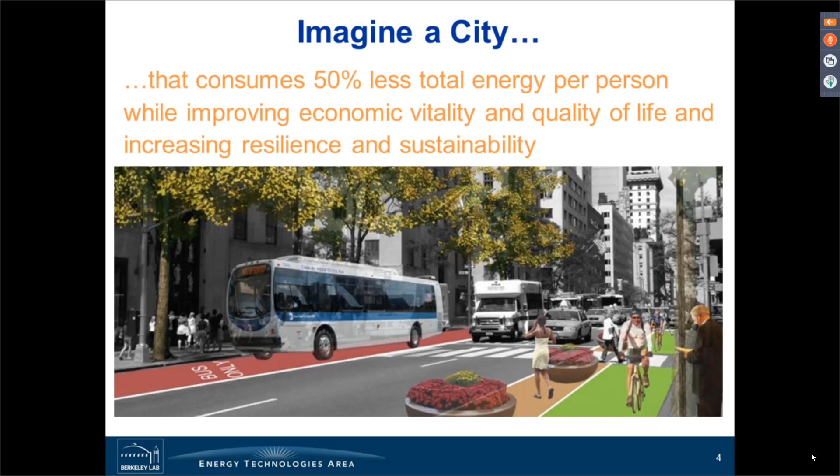If we look at urban research, we are basically talking about very broadly different sectors or areas - buildings is one of those, transportation, land use, air quality, water issues, public health, and electricity grid. All these are connected in one way or the other. So cities are a complex system of systems, research, if you will.

Particularly if we look at buildings, in the U.S. the building sector in cities consumes between 30 to 70% of the primary energy. There are city profiles by this City Energy Project, and if you look at, for example, a city like San Francisco, all the buildings consume about 52% of the energy. In New York City, you would imagine the ratio will be higher, it's up to 70%.

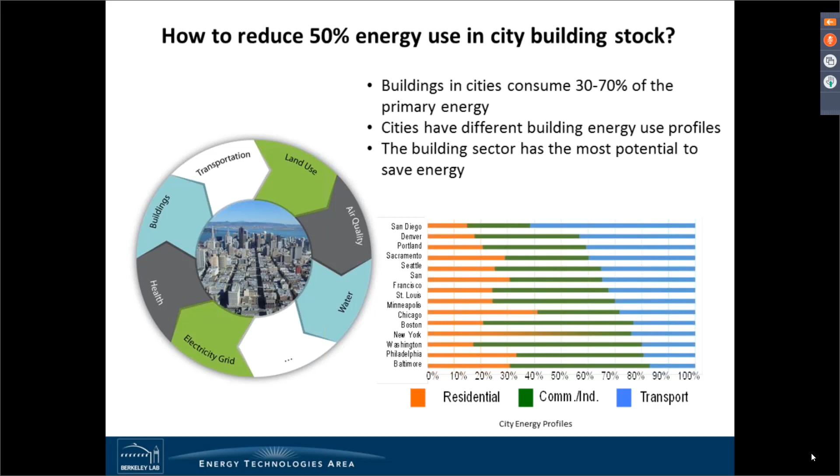So I think one of our research focuses is looking at the building stock in cities and looking at ways to help support cities in how to cut their energy use by half in the building stock.

I mentioned earlier, cities have challenges with all energy and environmental goals. More and more large U.S. cities are aiming for what we call 80 by 50 goals - basically trying to reduce GHG emissions by 80% by 2050. So I think to achieve the goal, what they really need is a lot of transparency, open data, and tools to support their effort to track and measure their progress.

So we have been working in an area trying to provide data and tools, and be able to collaborate with cities on how they or their consultants use the tools to support and prioritize, for example, retrofit investment, track their progress like energy consumption and emissions in the building sector, try to inform some of their policy making, for example incentive rebate design, and look at climate change impact.

And we've been working with a broad array of collaborators and partners - cities, urban developers, other DOE national labs. We also work with NIST on its Global City Teams Challenge, and some nonprofit organizations like C40, USDN, Smart Cities Council. There's also the International Energy Agency program in energy in buildings and communities. And of course universities are very active, so we also work with some universities and industry as well.

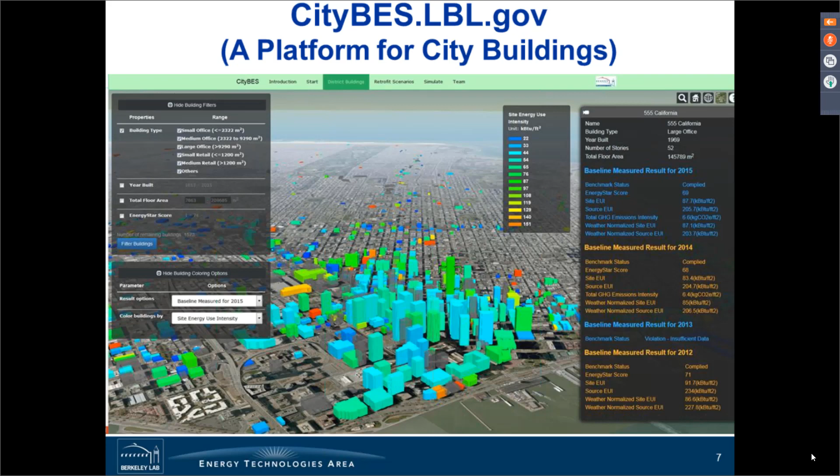So for the workflow, we have been designing the architecture of CityBES. There are, if you will, three layers. On the top, there's a data layer. Under the hood, we are using EnergyPlus and OpenStudio for the detailed energy modeling. So it's got weather data, and the building model uses a lot of geometry data. The building stock data also includes the building type, floor area, vintage, all that information.

And then use cases, just to illustrate some of the use cases our platform can do at the moment. We do portfolio-scale energy benchmarking. We're planning to do urban energy planning, and currently we have invested a lot of our time and effort in large-scale energy retrofit analysis, which we introduced as one of the case studies. And if we get access to large-scale smart meter data, we're also interested in looking at building operation at a large scale.

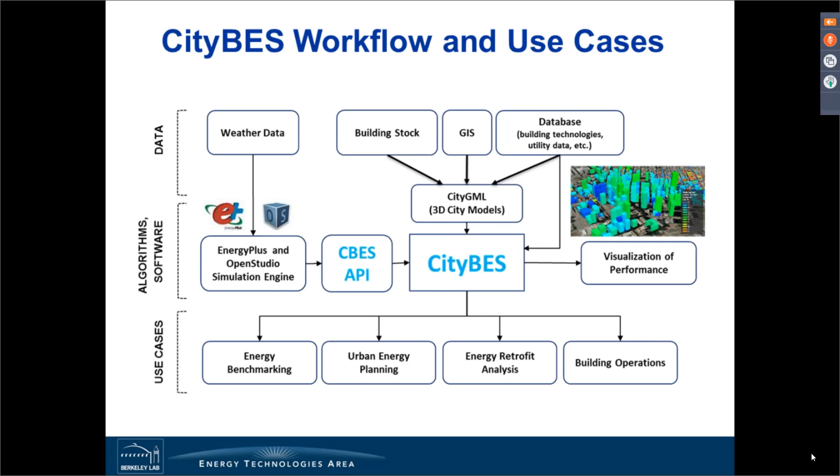So this is an illustration of how we work with different city departments to collect and integrate their data sources to develop these master building data sets. Cities have data in different departments. For example, we have the building footprint from one department, and the land use data from the planning department. There are also the county's tax assessor records. And the Department of Environment in San Francisco also has their public building energy disclosure data set.

So all these data sets have different attributes for each building. So how do we massage them, integrate them, and create this master building data set? In this case, for San Francisco, there are about 200,000 buildings, each building has one record, and we have about 200 attributes. Of course, some buildings have more, some buildings have less.

And then we integrate that into a master database and standardize the terms using the Department of Energy's BEDES, the Building Energy Data Exchange Specification. Basically, that's a standardized data dictionary. And then we create the database in different formats. CityGML is one; we also create GeoJSON and GDB as well. These different formats are used by different tools for different applications.

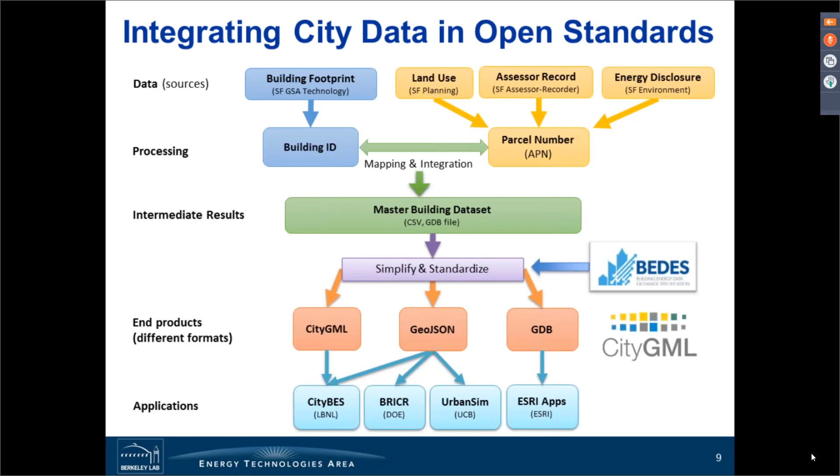So let's talk about CityGML. The development has been going on for about 15 years, and the good aspect of CityGML is that it's big and designed to represent all the city's infrastructure, including buildings, transportation, streets, terrain, water bodies, trees, and, if you will, everything you see physically in a city. And it provides a flexible way to represent these physical objects in a model.

For example, the bottom of the figure shows different levels of detail, called LOD, to represent a building, from very simple, like just a footprint, to a simple shoebox, and then adding more details like the geometry, floors, roofs, the facade, shading, all the way to level 4, with detailed internal partitions of the space, depending on your needs.

So these different levels of detail provide flexibility, especially when we're talking about hundreds of thousands of buildings in a city. Some of them have more detailed information. Some of them have very limited information. So I think CityGML provides very critical flexibility for representation.

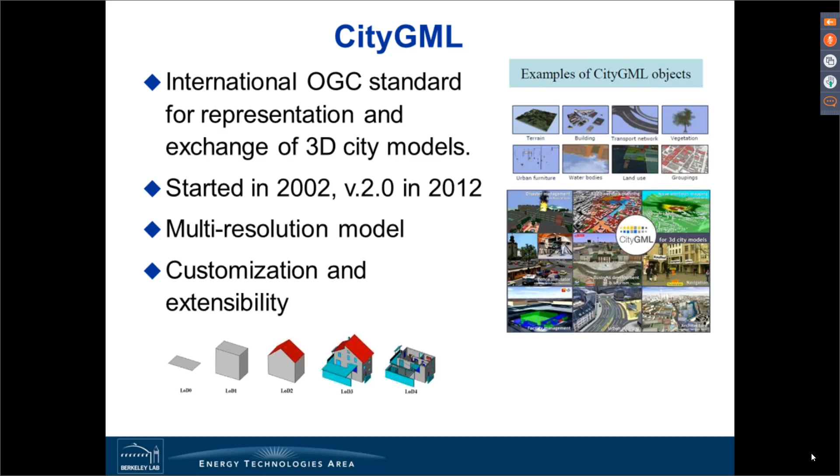So when we talk about modeling buildings in cities, it can get complicated, from the details of modeling, also from the scale of computing resource. So it can be an exascale computing problem. Exascale basically is we're talking about 1,000 times faster than the current machine we have. So why is it an exascale problem?

If you look at it, there are hundreds of thousands of buildings in a city, right? And we need to model these buildings at very fine spatial and temporal resolution. And then consider these buildings, they are not isolated and simple individuals. They are connected one way or the other. If you look at a street in a city, buildings on both sides have very strong radiant heat exchange.

There's a shading effect. There's also coupling to the local urban microclimate; we're talking about the urban heat island. And if you have district systems, they're also serving a group of buildings. So they are connected on the system level as well.

So with all these connections, and then the other connections between buildings and other sectors, we talk about urban microclimate, but it's also potentially transportation. So we're talking about electric vehicles. When people arrive using an electric vehicle, they may need to charge it. So it ties to a building's load demand as well as their PV production and how those are used.

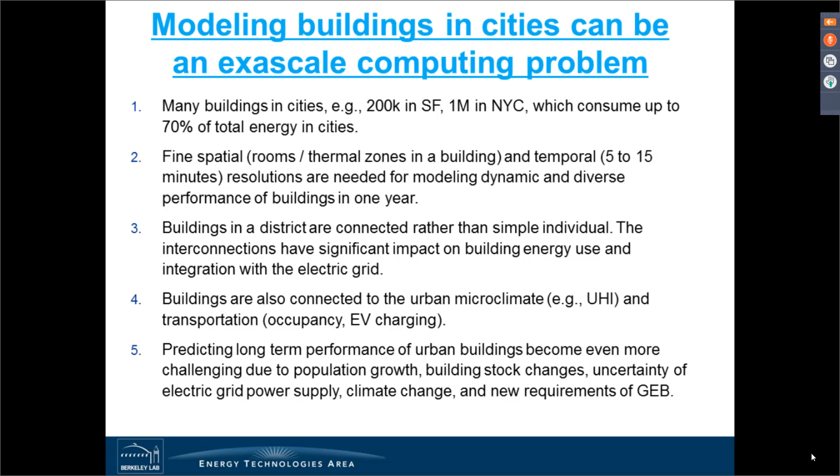And actually, we are working with Argonne, Oak Ridge, NREL and PNNL. This is an exascale computing project. We call it multi-scale coupled urban systems. And in this project, we are very interested in how we develop tools and data to simulate the interconnections between the sectors I talked about, buildings, urban microclimate, and transportation. And on top of that is all the pricing and how people make decisions.

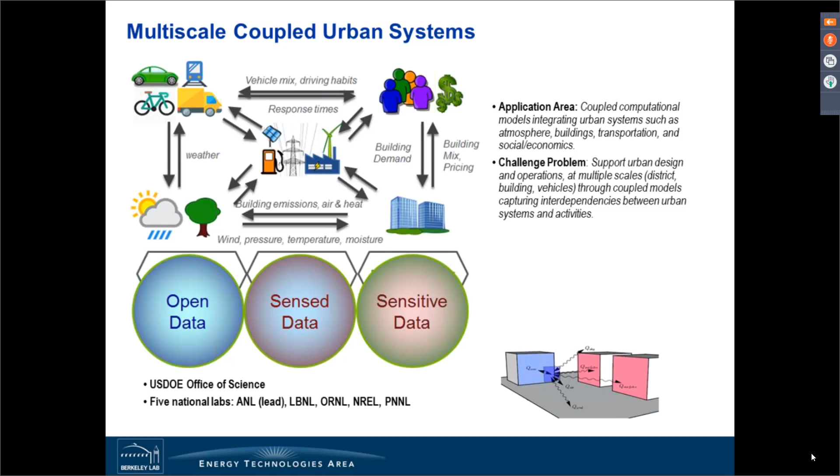So if you look at all these, then it's complicated. So we're just in the middle of this 3-year project. I think later Xian will talk more about the technical progress. So now I will pass to Yixing to talk about two case studies using CityBES.

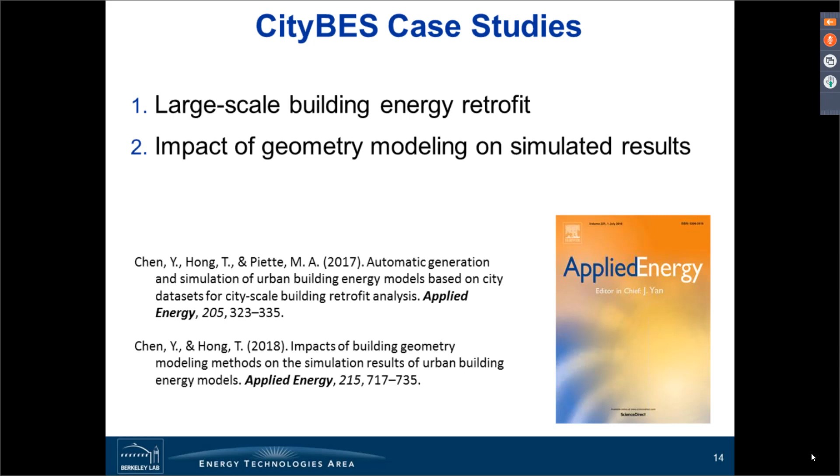So of these two case studies, one is for large scale building energy retrofit, and in the other one we try to understand, if we model the geometry differently at the urban scale, how the results are impacted. Those two studies have been published in Applied Energy recently. So for the retrofit analysis, we picked the 940 office and retail buildings in Northeast San Francisco as a starting point. We picked about a dozen retrofit measures, from lighting systems to HVAC systems and water heaters.

So you can see at the bottom, from the CityBES analysis, the retrofit total energy savings as well as the payback years. For example, for San Francisco climate, upgrading to LED lighting, using plug load controllers, using occupancy sensors and daylighting sensors, as well as resetting temperatures, has huge energy savings with low payback years. And also an airside economizer is beneficial in San Francisco due to the mild climate, so it also has a low payback year.

So these 6 measures seem very good for San Francisco climate, so we did another package for those 6 measures, because different measures may interact with each other. For example, the occupancy sensors and daylighting sensors both impact the lighting control, and their combined effect may not be the simple sum. So that's why we do these packages to see the overall energy savings. For all those buildings, the savings can be around 30% up to 50%, and the average payback is around 4.3 years.

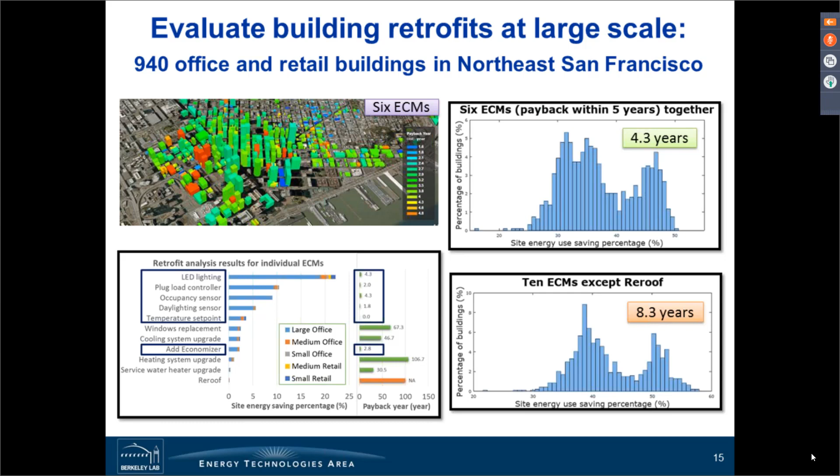For example, this is the payback year, and then you can see color coding and targeting those buildings. And in here, I will introduce some of the details about how we model the buildings. So this is some algorithm we developed to simplify the shading. So for example, in EnergyPlus, we model the building in the center. That is the EnergyPlus model there, and we need to consider the shading from all the surrounding buildings.

So there are some algorithms because all the surfaces are very complex. We use the GIS footprints to create those surfaces and buildings, and the GIS data has a lot of noise. So we need to simplify those shading surfaces. For example, the first step we do is to simplify the buildings that are far away into rectangular boxes, representing their shapes.

And the more advanced algorithm we developed recently is to first pre-scan all those surfaces and make sure some of the surfaces will never impact the building. So we remove those surfaces, and it results in much less surface for EnergyPlus to simulate. You will see most of the buildings will be represented using only 2 surfaces, or some buildings can use 1 surface. And this can speed up the simulation up to 30 times.

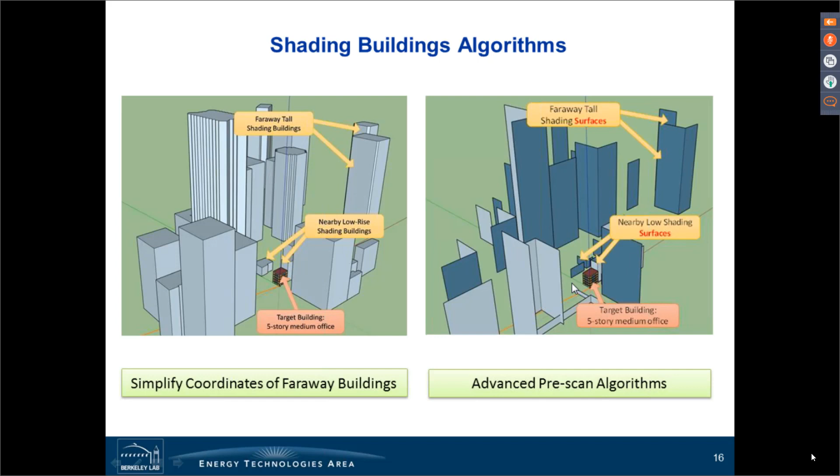And in order to consider the zoning of the buildings, because if we model the buildings in just one single zone, there may be some cancellation of the heating and cooling loads. So in order to avoid this, we developed this pixel-based automatic thermal zoning algorithm, so that if you have any polygon or building footprint, we can separate the internal and external zones, the core zones and perimeter zones. For example, from the starting point, we find all the boundaries and then connect the thermal zones.

So you can see on the top is a demonstration of the 4 steps for one building, and on the bottom the methods are applied to 4 example buildings, and you can see the algorithm works very well processing any kind of building. For example, in the first one on the bottom, a lot of the coordinates are not very clear, and we can still process all those shapes.

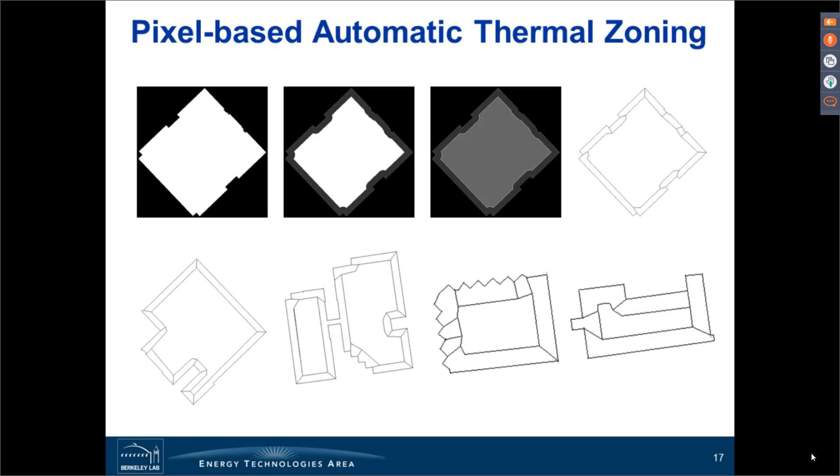And the second study we are working on is to consider the impact of different geometry modeling methods. So in this case, we compare 3 different geometry modeling methods. In the first, we still model every floor, but for each floor, we just use one zone. So there is no detailed zoning at the floor level. In the second method, we split the footprint into core zones and perimeter zones.

As you can see here, we also detect whether the building is attached to other surrounding buildings. For example, in both the one zone and core-perimeter zone cases, you can see the surface on the right hand side has no windows because it's attached to another building. And the third method we use is called the prototype method. In the prototype method, we use DOE's prototype office building to model the building. In this case, it's a rectangular box, and we also calculated the orientation from the original building.

But you can see there are some places that are not so similar to the original building. For example, the windows on the right hand side are still there because more than 50% of the wall has windows on that face. In this case, we also study the floor multiplier. If we use the floor multiplier, we only model three floors: the top floor, the ground floor, and a middle floor with a floor multiplier. In this case, this is a 6-story building, so the floor multiplier is 4 for the middle floors.

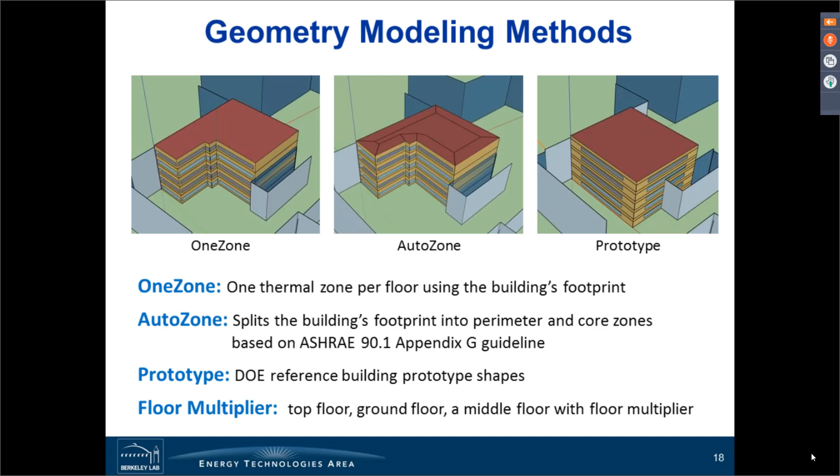And the results are shown here; I'll quickly go through them. For more detailed results, you can refer to the paper. For using the floor multiplier, the electricity and source energy use differ within about 2.5%. So you can see that they are very close. Of course, there are some outliers there, but overall it is 2.5% at the 95th percentile, and the median is close to 0.

So in this case, using the floor multiplier can speed up the simulation by 2 to 3 times. And in this case, we consider the overall portfolio, because a lot of buildings are not suitable for using the floor multiplier if they have 3 floors or fewer.

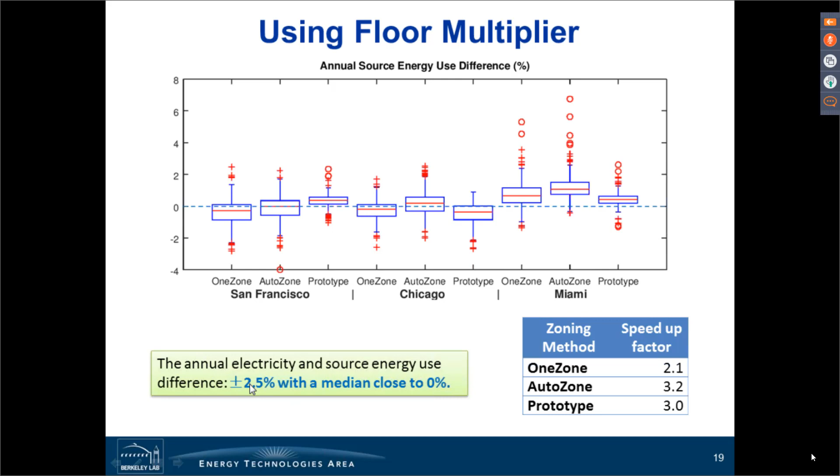that if you model one zone for the whole space, sometimes when the core zones need cooling and the perimeter zones need heating, those cooling and heating loads will be cancelled out. That results in, when you model one zone only, less space cooling loads and also less space heating loads, and this contributes to the cooling capacity and heating capacity of the equipment.

But in terms of the source energy use, for the cold and hot climates we show that using one zone, we underestimate the energy consumption. But for San Francisco, the climate is mild, so the case is more complicated. We have a very detailed analysis of why San Francisco is showing those kinds of increased or reduced results.

Because in this modeling, we don't take the cooling and heating load directly and then apply a COP or efficiency value. We model the detailed HVAC systems. And using one zone, you can speed up the simulation by about twice or 2.4 times.

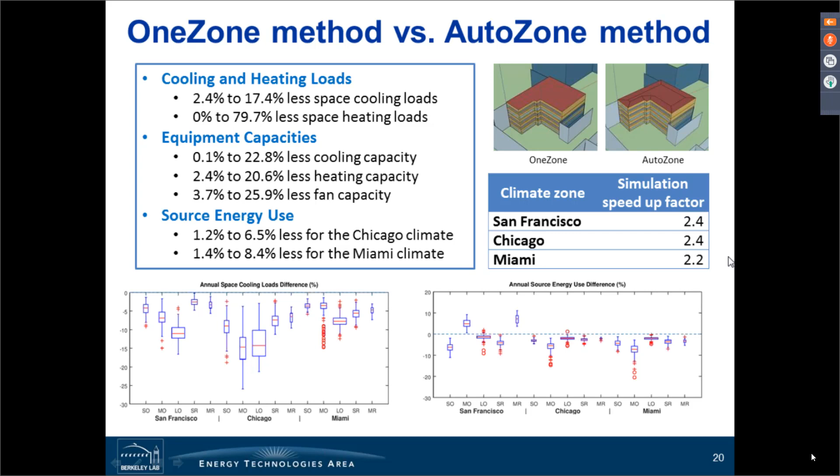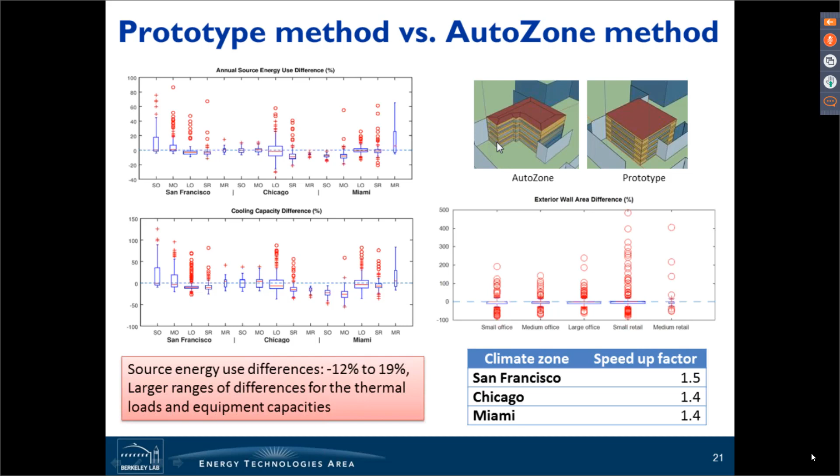So those are the studies. Then Shen will continue. Next, Shen will talk about how we model the urban buildings interconnection using EnergyPlus.

Thanks, Yixing, for a detailed introduction of the techniques and tools. With the previously mentioned techniques and tools, traditional building energy modeling can be both improved and scaled up from individual buildings to districts and entire cities. However, this requires a more detailed simulation engine to incorporate this level of simulation.

So in order to expand the capability of EnergyPlus to model urban buildings, we added 2 features in EnergyPlus 8.8, which was released last September. The first is we explicitly consider the long-wave radiation exchange between buildings. Previous research reveals an average of 10% difference in cooling load with and without modeling this effect in dense urban areas with high-rise buildings.

And as the left figure shows, previously in EnergyPlus the heat balance equations were oversimplified. To model this radiant heat exchange effect, we added the feature to consider not only the long-wave radiation from sky and ground, but also from surrounding surfaces, to model the thermal interaction between buildings.

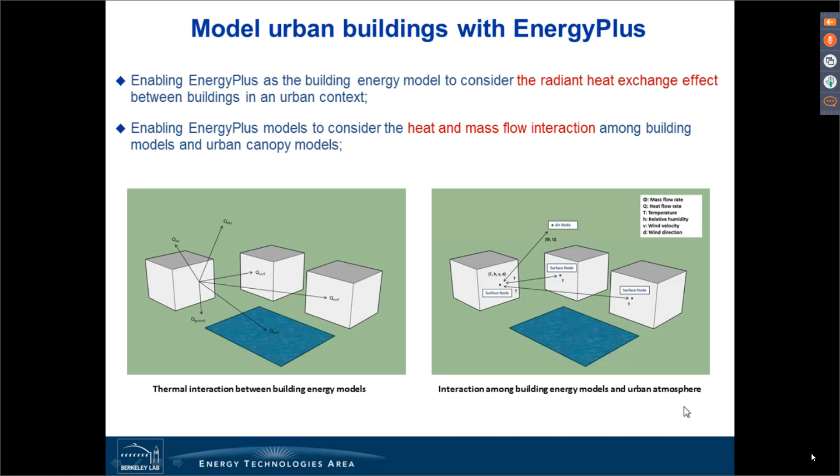This enhancement not only serves our urban energy model work, but also serves as the basis of another project that Kendra mentioned, the multi-scale coupled urban system. As this framework shows, cities are integrated with many infrastructures and human systems, including transportation, buildings, socioeconomics, and energy.

These were modeled individually previously, but in order to optimize city design and operation, we also need to understand the interaction between systems. So the project is to develop a modeling framework of the metropolitan system of energy and economic dynamics. The baseline problem is to simulate this kind of coupling within a city block, and our target is to scale up to a city, so that's why it's an exascale problem.

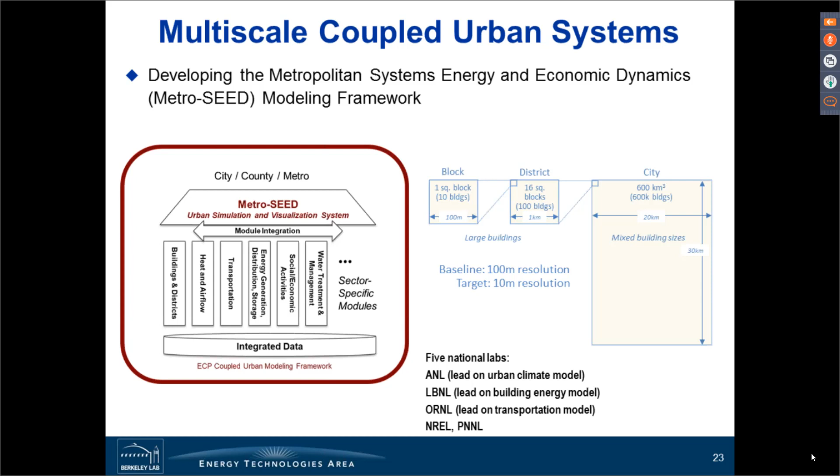This kind of simulation does not only require the enhancement of the simulation engine itself, but also requires a common data exchange mechanism to support the diverse content, volumes, and characters of data between models. It also requires a method to support optimizing spatial and temporal resolution for significant differences in runtime.

For example, for EnergyPlus, the runtime is a 10-minute interval resolution, but for urban microclimate, it could be milliseconds. So we designed the coupled architecture as the diagram shows, with each model taking different external data sources and integrating them into the common platform.

For example, at the upper right, EnergyPlus takes building energy, building information, and GIS information, and we run 2 levels of coupling. The first is with the urban atmosphere, the Nek5000 model, with which we exchange environmental data. The second level is to exchange hourly locations of individual agent data.

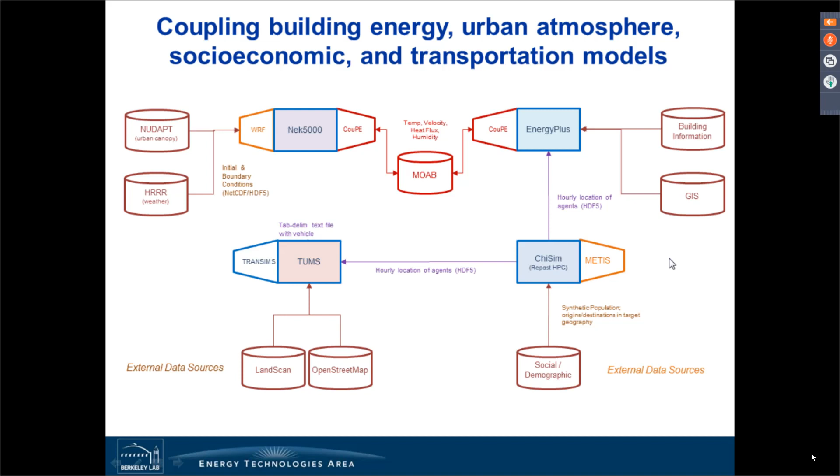In the workflow, live sensor data, historical data, and data from current simulations serve as the input data for initialization and output. The data hub shown here holds the data exchange protocols between models.

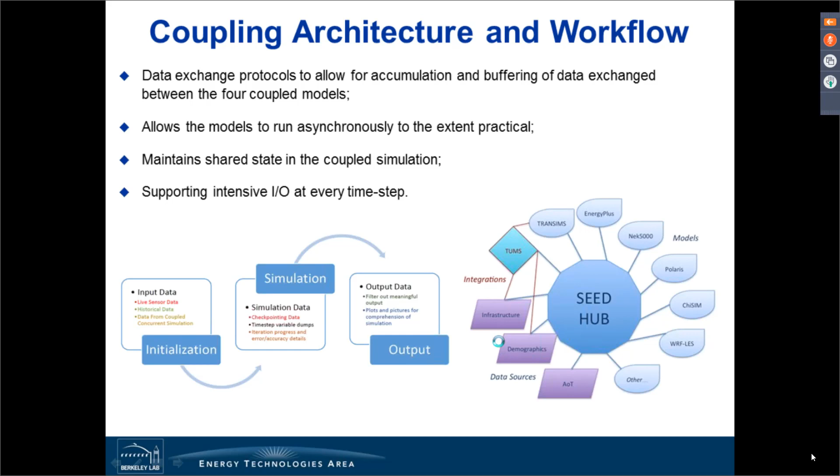Specifically, take the workflow of the urban energy model coupling strategy with urban atmosphere as an example. As the diagram shows, EnergyPlus allows data input as arbitrary coordinates as a local climate condition from the urban atmosphere model.

It also allows data output at surface zone node level as boundary conditions for the urban atmosphere model. The data exchange is performed at the surface zone and air node levels.

At every time step, EnergyPlus takes input from the urban canopy, including local air, dry and wet bulb temperature, and at the same time, at each time step, it outputs heat flux rate, zone airflow rate, and system exhaust flow rate to the urban canopy.

This kind of coupling is manipulated by the air nodes. The node has absolute coordinates holding those environmental variables and serves as the unit of data exchange.

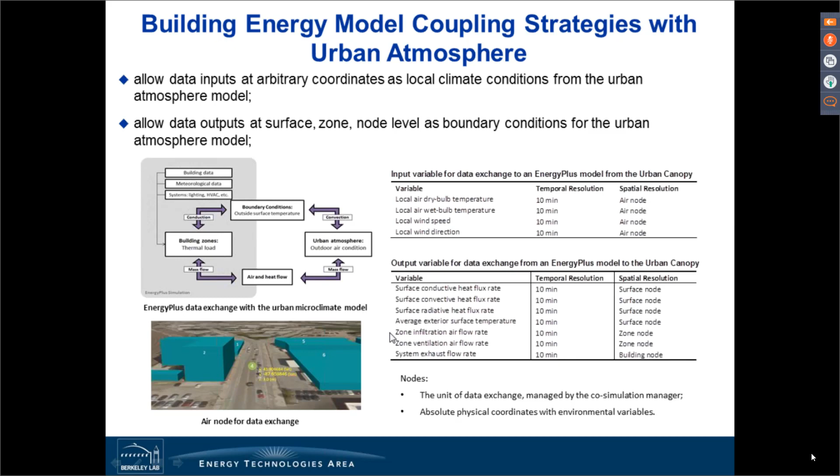More specifically, this is a case study we are doing right now to study the EnergyPlus and Nek5000 coupled simulation. The baseline model is a city block in the North Branch area of the city.

Hello, Xuan. Hello? Yes, we are having difficulty hearing you. Your voice is fading in and out. Can you get closer to the microphone? Okay, how about now? Now it's better. Yes, okay.

So each surface, we choose 15 air nodes at arbitrary coordinates. Some are over the river and some are between the urban canyons.

Each surface and each zone of each building is mapped to its nearest local air node. During the coupling, EnergyPlus wants velocity and temperature from the urban canopy model, and the Nek5000 atmosphere model wants heat and mass flux from EnergyPlus.

Based on this architecture, we performed one-way data exchange to analyze the data sensitivity. We're in progress of trying advanced coupling architecture to perform real-time coupling, and that will be our ongoing progress in the future.

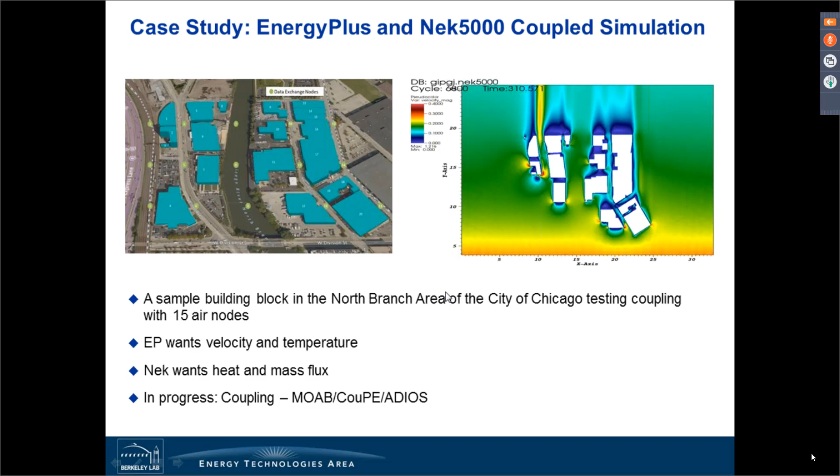So let's get back to Yixing for the demonstration. Yixing will give a quick demonstration of the tool.

Before that, I mentioned at the beginning these are some of the research we are conducting. But at the Berkeley lab, we have other teams working on different research areas related to cities.

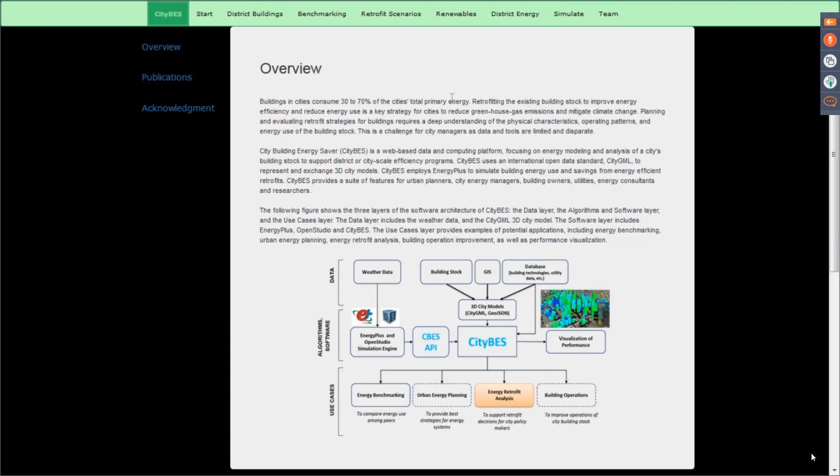Okay, so the tool currently is hosting, and then you can go to using it. It's called citybes.lbl.gov. So if you go to the website, you will see an overview.

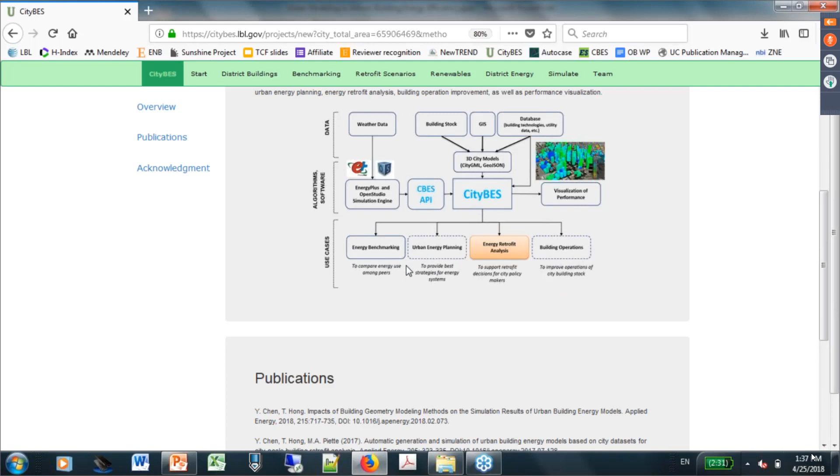So basically, those are introduced by Tianzhen already, and the workflows as well. So we have a set of publications here, and then I will go through the steps.

So in here we have simple registration steps. For example, you can log in or you can sign up, and then there is a place you can go to create an account, and we simply ask a name and email address. Those are used to associate your account with the local data set that you created. For example, in this case, we are using Tianzhen's account.

So in this case, you will have a shared data set that is shared among the users. And then you can also have your local data set if you don't want to share with other people, and then you can manage the local data set.

So in this case, we can select one of the case studies we just presented. This is including about 9,000 buildings in northeast San Francisco. So you can see the platform is very fast. You can load the data in seconds, and then it pops up the data.

So there's features that you can use. This is a GIS integrated platform, so you can choose different maps to show the data, and on the left-hand side there are some functions where you can filter the buildings based on the building type.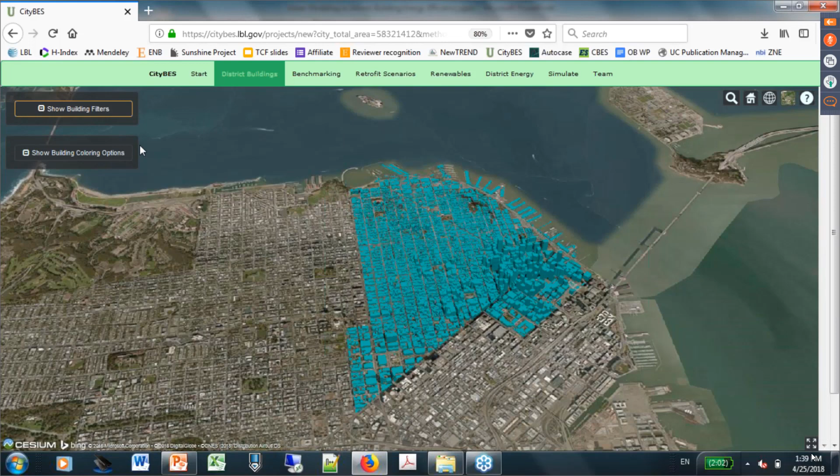And then there is a function for you to show the results. This page is a visualization function to visualize the results and analyze the results. For example, this includes the baseline simulated results as well as the results for each retrofit package we just simulated. And then it also includes the meter data set.

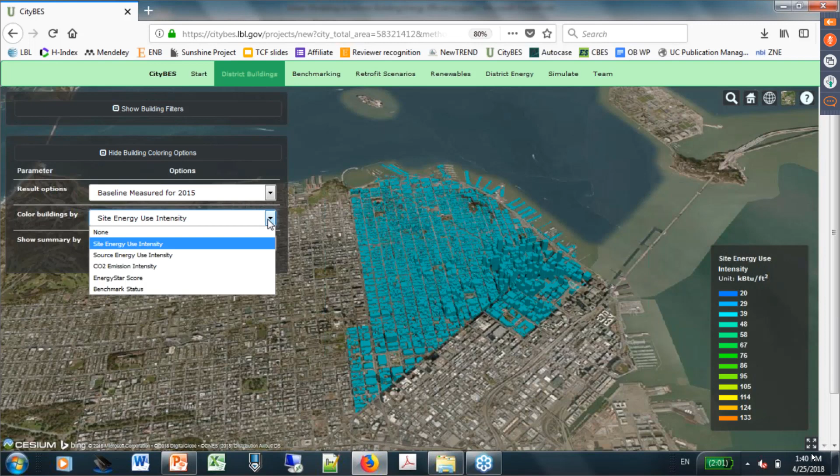For example, this includes the meter data set for 2015, and then there are site EUI, source EUI, CO2 emission, Energy Star score, and benchmark status. So this includes all the real meter results for those buildings.

So this is a visualization platform, and then I will introduce the different features one by one. So the first one is benchmarking features.

DOE created a database called Building Performance Database, which currently includes about 1 million data points in the data set. So for these features, we try to compare the buildings we have with the buildings in that data set.

So for example, in this case, we compare about 350 buildings in CityBES with about 63,000 buildings all across the U.S. These are all office buildings.

So you can see for San Francisco, the energy consumption is slightly lower compared to all U.S. buildings, because one reason is San Francisco has gone through a bunch of retrofits and the building energy consumption is significantly reduced. The other reason is San Francisco has a mild climate.

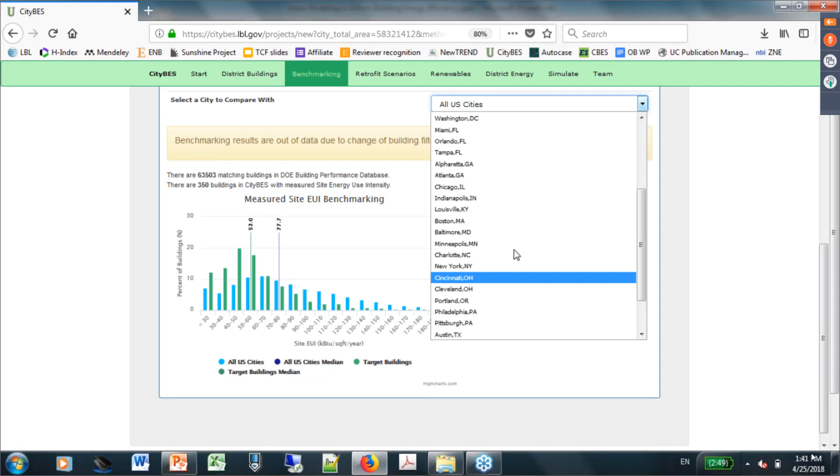But these features provide some of the compared regions. You can compare to a few dozen cities in the data set. So this is going to access the Building Performance Database in real time.

The other key feature we provide right now is the retrofit scenario analysis. The usage is very simple. We have about 82 measures in the packages.

For example, you can select from the drop-down list. There are a dozen categories here, including lighting, HVAC systems, plug loads, service hot water, and envelope systems. So you can pick from there, and each category will have several different measures, including different technologies.

For example, for lighting, you can do T8, T5, or LED, and for adding an economizer or economizer maintenance, and also plug loads controls, and so on.

So HVAC, window operations, and then for example, for heating and cooling systems, you have different HVAC system types - for example, single zone, packaged rooftop units, and chiller systems. And under the hood, you can update the efficiency values for each of those measures.

For example, you can update the cost data if you have more details. We provide those cost data based on our CBES project, and those can be customized. We are currently also working on a feature to calculate the GHG emission reduction and the material GHG emissions, and also you can customize the efficiency value of the retrofit upgrade.

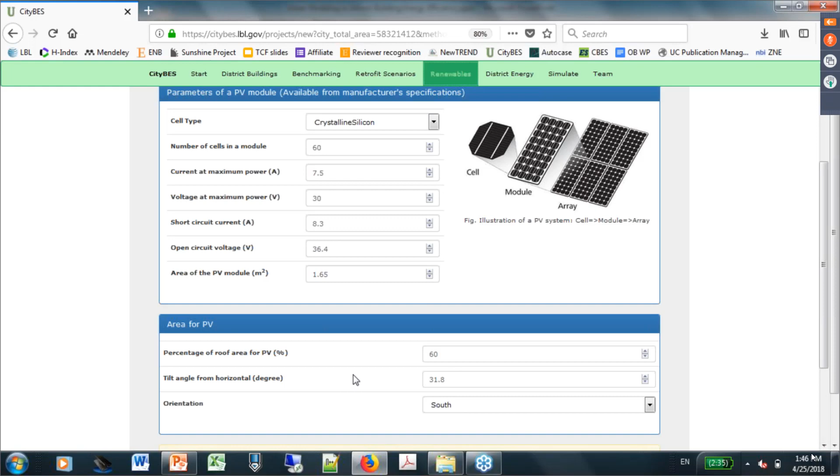In this case, we will create a model for all the buildings in the dataset, and then calculate the PV potential. For example, if you go back to these 3D buildings, you can pick the PV potentials there, and it will show you the generated PV intensities on the roof.

We are still working on these district energy features, and if you have questions you can always ask. So those are the 3D GIS, you can zoom in, zoom out. Those features are optimized many times, so it's much faster than some of the tools.

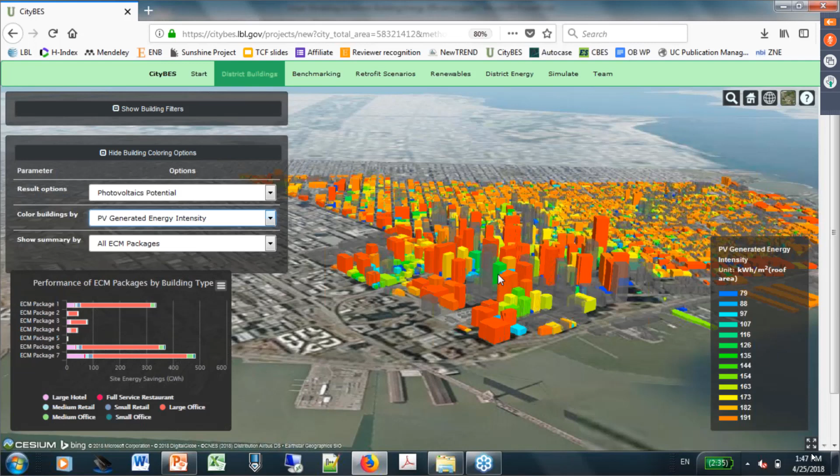Click one building, and then there's a home button here. You can zoom into the building. So if you click one building, you will see the detailed information of each building, including their basic information.

As well as, for example, the meter data for each year if they have it, and then the PV potential, water consumption, as well as the baseline results and the retrofit scenario of the savings and the cost savings.

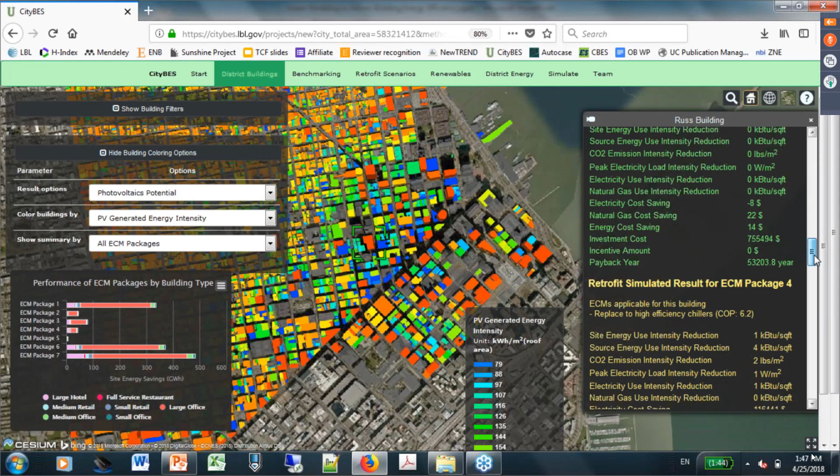And those are just now I presented the different methods of modeling. Those are all available through the settings in the simulation setting page. For example, the zoning method, you can choose core zones, perimeter zones, or 1 zone per floor or floor type building. And for the building, you can choose whether to use a floor multiplier or not, and whether to model the shading buildings or not. Those are for research purposes, if you like to explore the difference.

You can create detailed load profiles, hourly load profiles for all the simulation results, and you can customize the utility rates. All the results will be available for download in CSV format, including retrofit results for each building, as well as hourly load profile results. If you check to generate the hourly load profiles, that will be available for download in CSV format to support other visualization or integration.